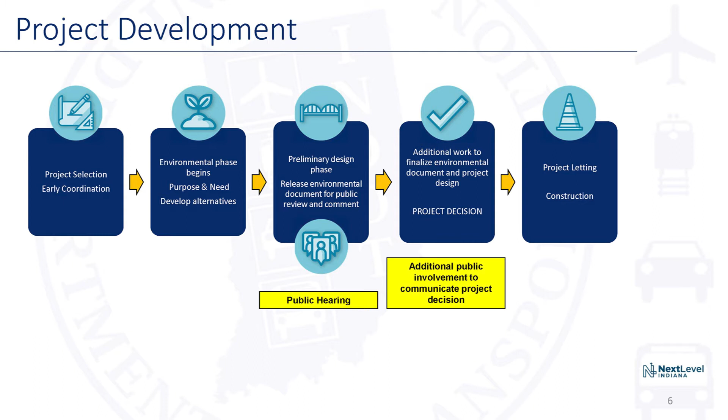It is at this time that a public hearing, like this one, is held. Following the public hearing, any additional work to finalize the environmental document for approval, as well as the design, occurs. As finalization of the design and environmental document happens, follow-up information to the public often communicates the project decisions before the project moves to construction.

The intent of the public hearing is twofold. First, it is intended to explain the proposed project and receive your comments, concerns, and suggestions. Second, it is a requirement of the National Environmental Policy Act that the public be afforded the opportunity to be involved in the decision-making process.

This includes accepting comments on the environmental document and preliminary plans. Early engagement of the public is intended to provide a better project for customers of INDOT. For this project, this hearing is a continuation of a public involvement process that began over a year ago with an informational meeting held in August of 2019.

Additionally, because this bridge is considered a historic bridge listed in the Indiana Historic Bridges Inventory, the convening of a public hearing is a requirement of the Historic Bridges Programmatic Agreement, signed between INDOT, the Federal Highway Administration, the State Historic Preservation Officer, and the Advisory Council on Historic Preservation.

All comments that we receive through this process will be given full consideration and incorporated into the decision-making process.

The format of the in-person portion of the public hearing includes an informal open house session before and after the formal presentation. During this time, the project team will be available to answer any questions you may have regarding the project. Conversations you may have with project officials during the open house sessions are not included as part of the project record.

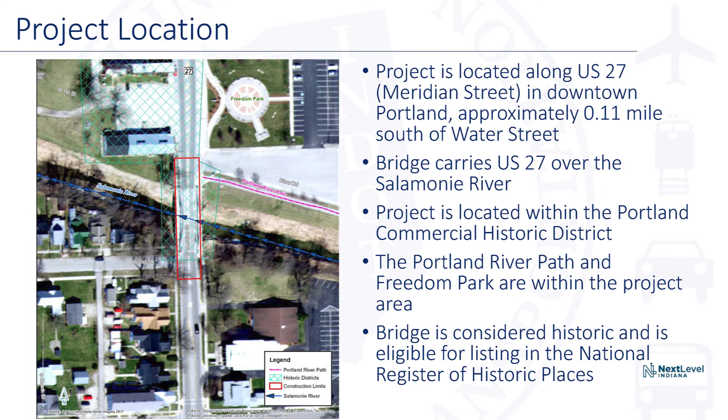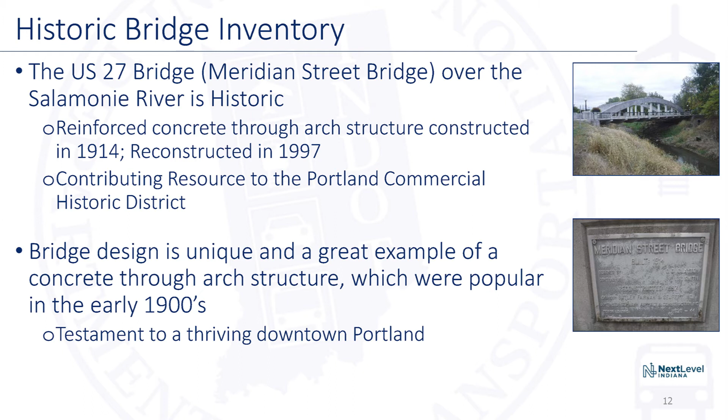The bridge to be rehabilitated as part of this project is historic and eligible for listing in the National Register of Historic Places. The US 27 bridge, a reinforced concrete through-arch structure originally constructed in 1914 and reconstructed in 1997, is considered a contributing resource to the Portland Commercial Historic District. The bridge is considered eligible for the National Register due to its unique design, which is a great example of a concrete through-arch structure in the state. Such structures were popular in the early 1900s, and this one remains a testament to a thriving downtown Portland.

The US 27 bridge is listed in the Indiana Historic Bridge Inventory as a select bridge. This designation means it is suitable for preservation and considered an excellent example of its structure type compared to other similar bridges throughout the state. Designation as a select bridge also means the bridge must be preserved when using funds from the Federal Highway Administration. Because the bridge is considered select in status, the project must follow the conditions set forth in the Historic Bridges Programmatic Agreement, following INDOT's Historic Bridge Project Development Process.

As previously mentioned, one of the first steps in the environmental process is identifying the purpose and need for the project. The primary need for this project is evident due to the deteriorated condition of the existing bridge's thin deck overlay, or its wearing surface. The wearing surface of the deck, last inspected in 2019 by INDOT, was determined to be in poor condition and has an estimated remaining life of five years.

Secondary to the primary need of the project is improving the appearance and condition of the coatings on the structure and its features. The paint coat on the existing steel railing and lampposts is peeling and exposing the steel underneath. In addition, the existing masonry coating on the arch and columns is discolored, cracked, and starting to peel. The City of Portland also desires improvements to the appearance of the bridge, as the bridge serves as a gateway to the historic downtown area.

The primary purpose of this project is to improve the condition of the deck wearing surface to a condition considered to be very good and to extend the overall life of the structure. The secondary purpose of the project is to improve the appearance of the structure and its features, which will act to slow future deterioration and meet the desires of the City of Portland.

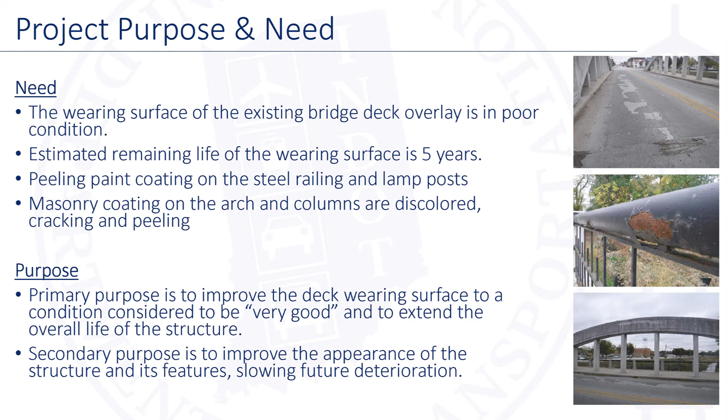The only other alternative that was evaluated for this project was the do-nothing alternative. This alternative would not involve any improvements to the bridge.

While this alternative eliminates costs and any environmental impacts, it does not address the purpose and need for the project. Under this alternative, the bridge deck will continue to deteriorate, and this continued deterioration will spread and accelerate deterioration of the underlying bridge deck floor system, requiring a more extensive rehabilitation to address the condition in the future. Therefore, it was eliminated from further consideration.

The preferred alternative identified for the project involves the rehabilitation of the bridge. The rehabilitation activity will be completed in accordance with the Secretary of the Interior's standards for bridge rehabilitations.

The Historic Bridges Programmatic Agreement requires the evaluation of several additional alternatives, arranged from the least harmful to the most harmful to the historic bridge. The preferred alternative was found to be feasible and prudent, met the purpose and need for the project, and had the least harm to the historic bridge. Therefore, in accordance with the historic bridge project development process, analysis of the other alternatives is not required.

In addition to the historical and cultural elements associated with the project that have been discussed, the environmental process also weighs the project's likelihood to impact other resource categories. These include impacts to ecological or natural resources like streams, wetlands, and other waterways, floodplains, farmland, forests, and endangered species. Impacts to humans, or the cultural environment, are also considered. Such resource types include parks and recreational lands, community resources, effects to low-income or minority populations, and impacts that may result to air quality and ambient noise levels.

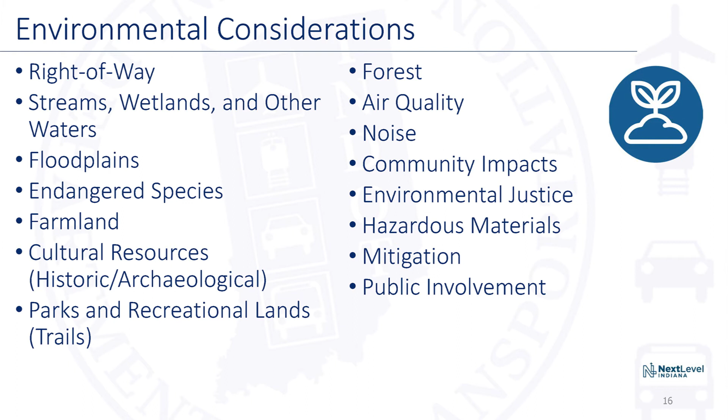The level of impact to these resources weighs into the need for mitigation and level of public involvement.

Through the Section 106 process and the Historic Bridge Project development process, comments on the purpose and need, the alternatives analysis, and the effects of the project on cultural resources, including the bridge itself, have been sought from consulting parties. To date, there have been no objections regarding the project or the planned improvements. This process has resulted in the identification of a preferred alternative which, as previously mentioned, involves repairing and rehabilitating the bridge in a manner that retains its historic integrity.

Because of the involvement with the bridge listed in the Indiana Historic Bridges Inventory, the convening of a public hearing is required. Following the end of the public hearing comment period, the environmental document will be approved by the Federal Highway Administration, which will mark the end of the Section 106 process.

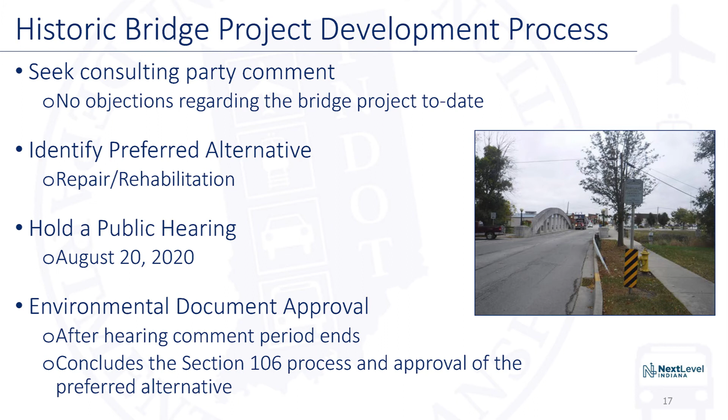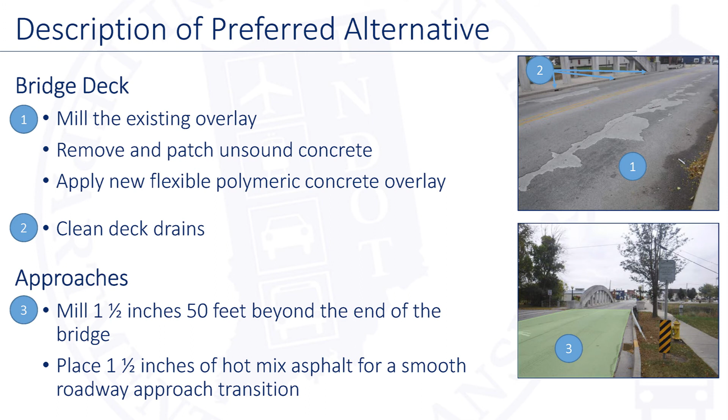The approaches to the bridge will be milled 1.5 inches for a distance of 50 feet from either end of the deck edge. A new 1.5 inch hot mix asphalt overlay will be placed atop the milled roadway surface. The new overlay will provide a sufficient transition from the bridge floor back into the existing roadway elevation. The limits of the south approach overlay operation is represented as number 3 here. In all, just over 123 linear feet of US 27 will be affected by the project.

A patch material consisting of a concrete mix with microsilica will match the texture and color of the existing concrete components. After cleaning and patching the existing arch, columns, and concrete portion of the railing, the appearance of the concrete components will be reviewed. If the appearance of the cleaned masonry coating is not a good representation of the existing structure aesthetic, the masonry coating will be completely removed using a chemical concrete cleaner and stain removal and hand tools. Once removed, the concrete components will be surface sealed with a tinted seal for protection, which would provide color uniformity on the structure and closely resemble the existing masonry coating.

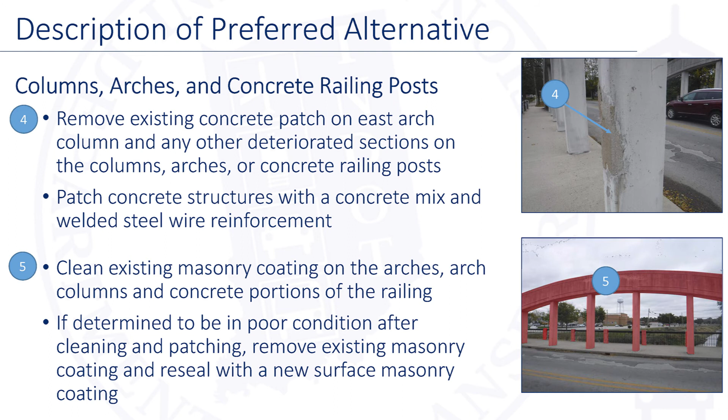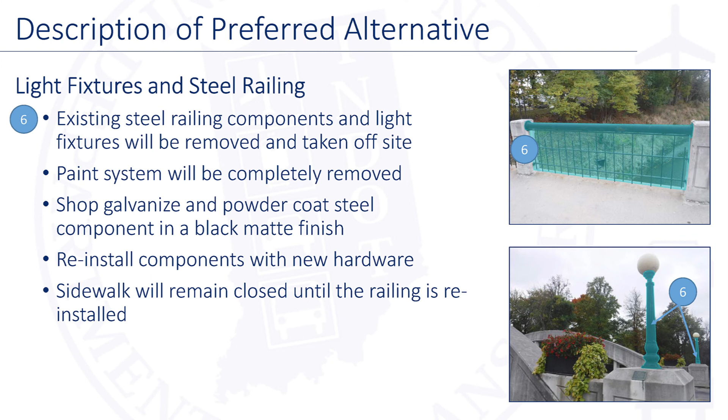By making these improvements, the condition of the deck wearing surface will be upgraded to a condition considered very good. Additionally, the service life of the bridge is expected to be lengthened by 15 years. This is merely an estimate of time before additional improvements may be required. However, in accordance with the Historic Bridges Programmatic Agreement, INDOT plans to preserve and maintain this historic bridge for at least 25 years.

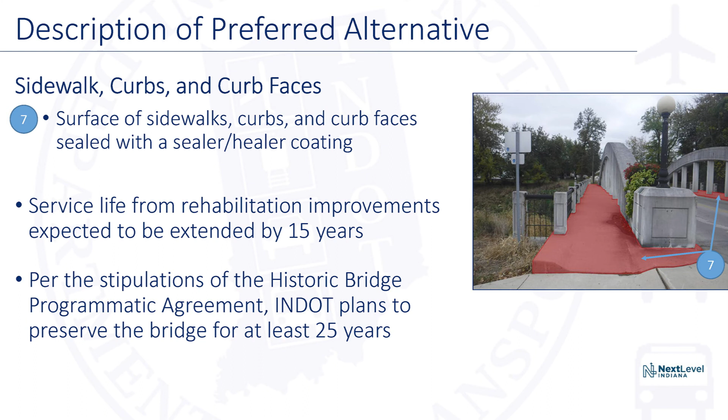A consideration given to every project is how traffic will be maintained during construction. Because of the nature of the project and the operations required to place this type of overlay on the bridge deck, maintaining normal traffic conditions is unable to occur. Therefore, the maintenance of traffic plan requires the closure of US 27 during construction and establishing an official detour route.

The signed detour route will utilize State Road 28 through Deerfield and Ridgeville, State Road 1 through Redkey, and State Road 67 to Portland. The total length of the detour is 24 miles and is expected to remain in place for up to 60 days. While the road is closed, access to properties within the project limits will be maintained at all times.

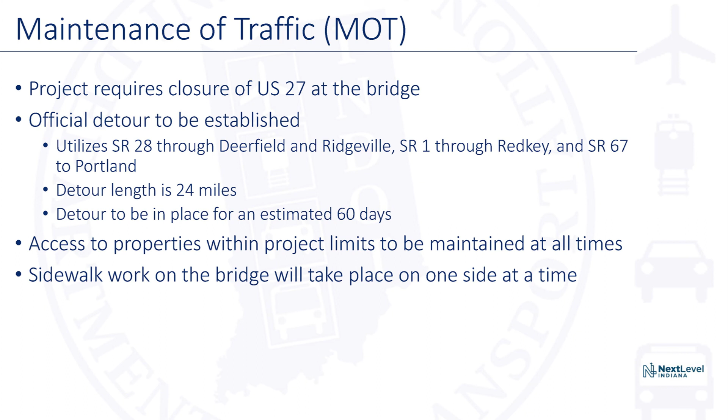The sidewalks will be closed, one side at a time, to ensure pedestrian access is maintained at all times. All construction activities associated with the project will remain within the existing state-owned right-of-way. There will be no need for additional permanent or temporary right-of-way to be acquired.

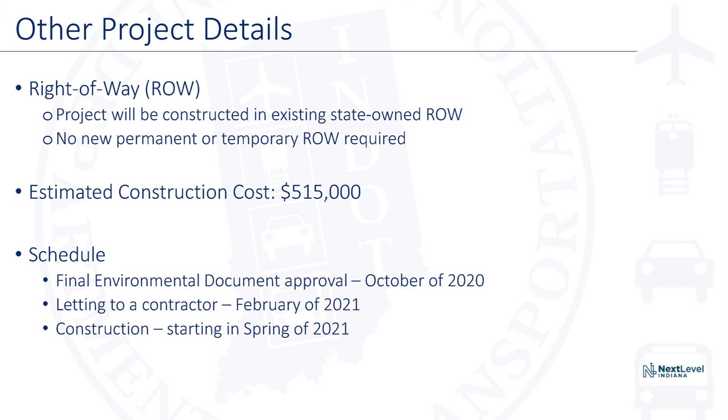The total estimated cost for the construction of the project is $515,000. The remaining schedule for the project includes final approval of the environmental document by October of 2020. After that, contracts will be prepared for a letting to a contractor by February of 2021. Once a contractor is selected, it will usually take 2 to 3 months to mobilize, which means construction will likely begin in the spring of 2021.

Several locations are serving as repositories for project documentation in an effort to make pertinent decision-making information available to the public for their review. Beginning on August 5th, the design plans and the environmental document were made available for public inspection at the INDOT Greenfield District Office located at 32 South Broadway Street in Greenfield, and the office of Lochmueller Group, located in Suite 150 of 3502 Woodview Trace in Indianapolis.

More locally, these documents were posted on August 5th at the Portland City Hall and the Jay County Public Library. Please note that should you want to view the documents at Portland City Hall, the scheduling of an appointment may be needed. In addition, this information, along with other documentation pertinent to the Section 106 process, like the Historic Bridges Alternatives Analysis and the No Adverse Effect Finding, are posted to the project webpage.

These documents will remain available for public inspection at least through the end of the public comment period, which expires on Friday, September 4th. Following the public hearing, the public and stakeholders will be able to provide comments on the project through Friday, September 4th. All comments received by this time will be given due consideration in the decision-making process.